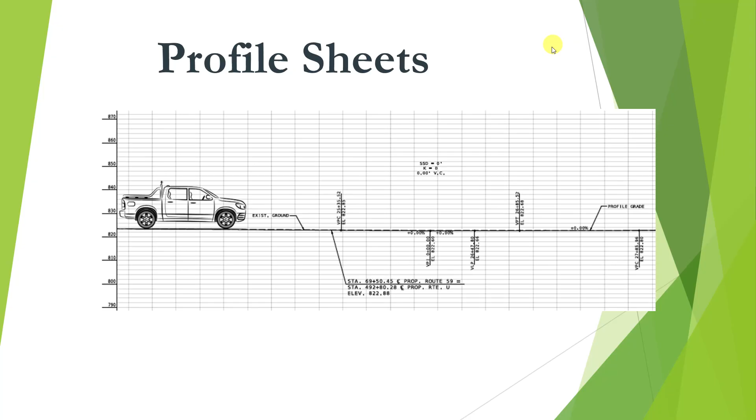For profile sheets, you can see the EPG handout on plans and profiles. Profiles can either be shown on the bottom half of the plan sheet or have an entire sheet dedicated to the profile. It shows the vertical alignment, the hills and sags, standing on the shoulder looking toward the center line of the roadway, typically controlled by the K value from a speed table, and we'll talk more about that.

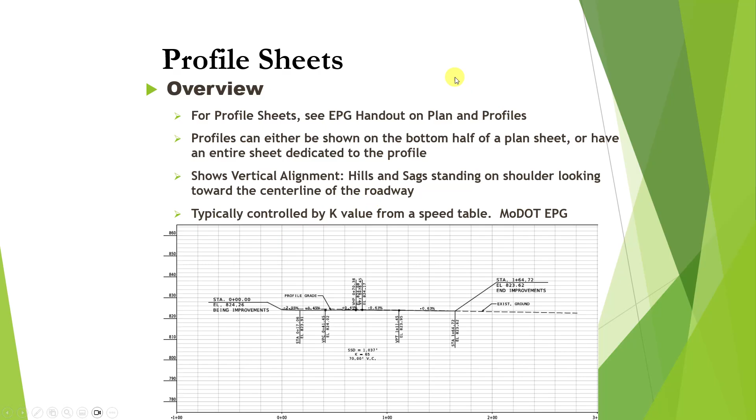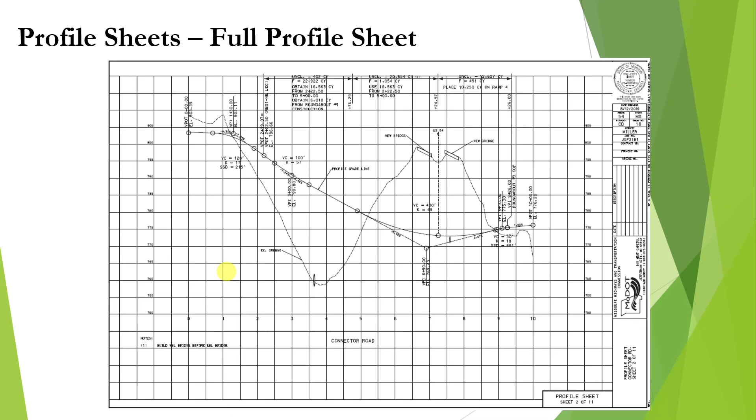And a lot of times these profile sheets are exaggerated. They're shown to be exaggerated so that you can see the sags and the hills that's going on with them. Okay. Now, sometimes you can fit two profile sheets on one, and that's what a lot of people like to do. Our bridge profiles, they do a lot. They end up with a whole bunch of that.

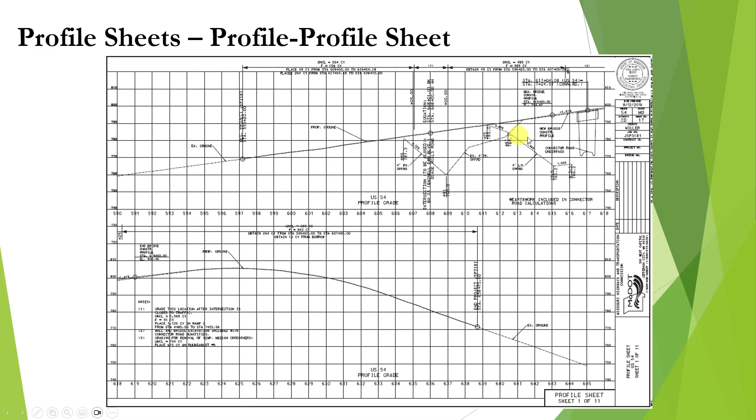Types of profiles that we use are roadway and median center line. They're the same. And then you have existing grade. You want to see the ground. See that previous slide out there. Didn't have any. You can see existing ground right here. And you can see it up here. You got some existing ground going on here. You got some existing ground here. So it's always dashed is what you'll see on that.

Edge of pavement line, you'll see that. We do profiles on edge of pavement lines. We do a profile on a shoulder line. And ditch profiles are used a lot. Other items that may be shown on a profile is the storm sewer system or underground utilities. You might see those on your profile sheets.

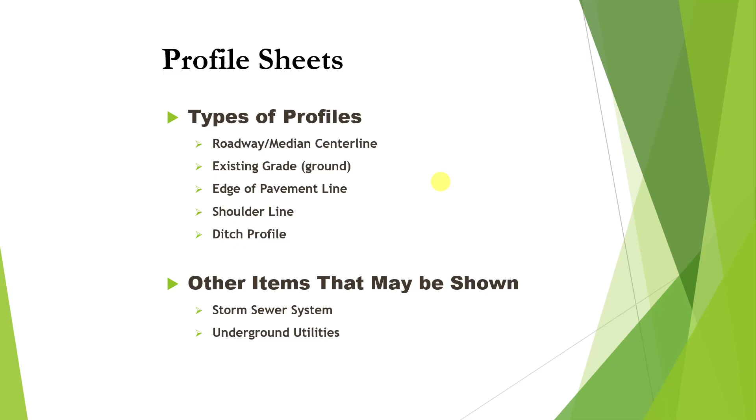Now, to scale, the way this works is it's 100 foot between horizontal measurements and 10 foot between the vertical measurements. It's skewed to show the changes in elevation. So yeah, we change it so that you can see that change, the big curves instead of just a small little curve that you can't see. That's why the elevation's like it is.

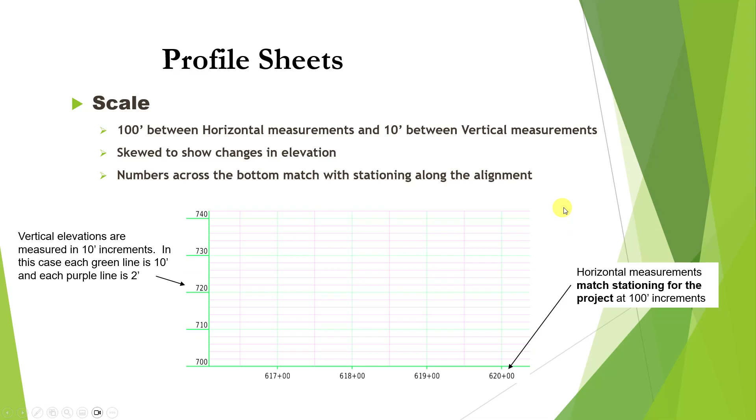What is a grade? When working with the roadway profiles, the terms grade and gradient are typically used to describe the change in elevation for the line work displayed. Grade designations are usually shown as a percentage, but can also be shown as an expression of feet per foot. For example, a grade has been calculated at +0.0425 feet per foot. This can be designated as +4.25% or as 0.0425 foot per foot. Now, a lot of times we use the 4.25% in this case.

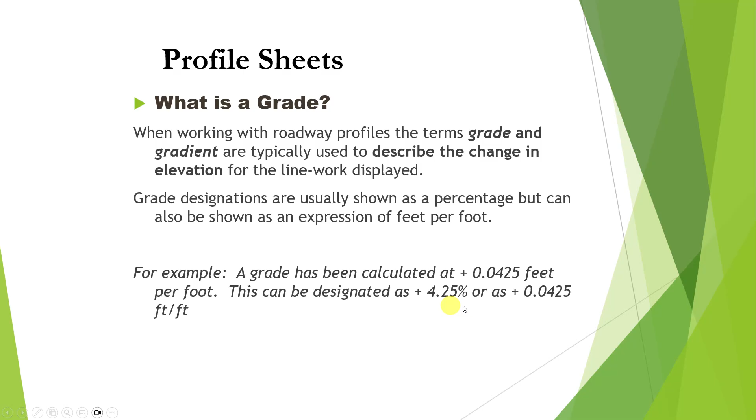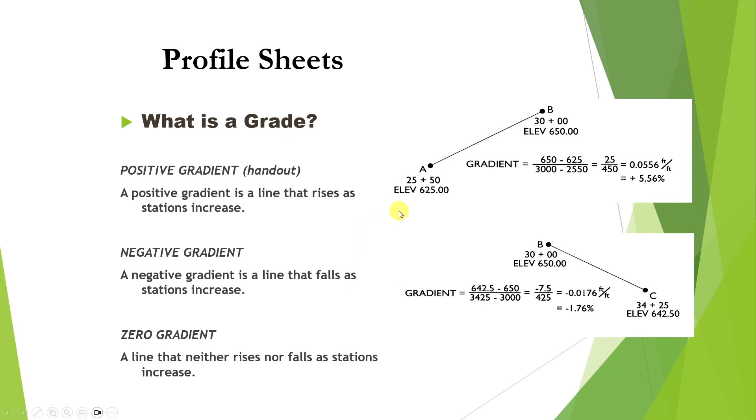A negative gradient means it's decreasing. So we're starting over here at this 30+00, and we go to 34+25 on our stationing, and our elevation goes from 650 down to 642.50. That is a negative gradient. Zero gradient is a line that neither rises nor falls as stations increase.

Vertical curves, just like the horizontal curve, there's a lot of information on what a vertical curve is. The important ones are the beginning of the vertical curve, a point where the tangent ends and the vertical curve begins, and then the EVC, which is our end of vertical curve, that point where the vertical curve ends and the forward tangent begins. Those are important. The length of the vertical curve is important. We use that a lot in design. Just some important stuff.

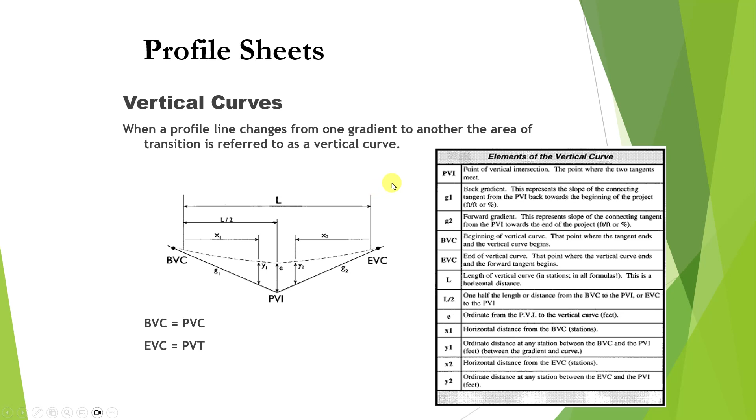Cut and fill. Cut is an area of existing ground that falls above the proposed project profile. Fill is an area of existing ground that falls below the proposed project profile. Designers attempt to balance cut and fill for a job, and profile sheets can help them do this.

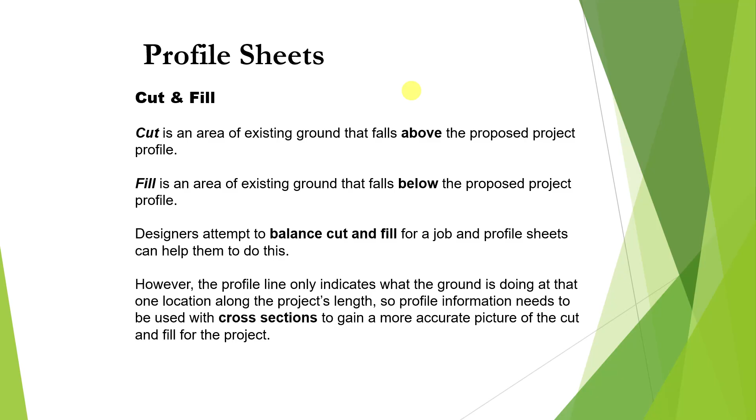However, the profile line only indicates what the ground is doing at that one location along the project's length. So profile information needs to be used with cross sections to gain a more accurate picture of the cut and fill for the project, and we'll talk about cross sections later. And that concludes the profile video.